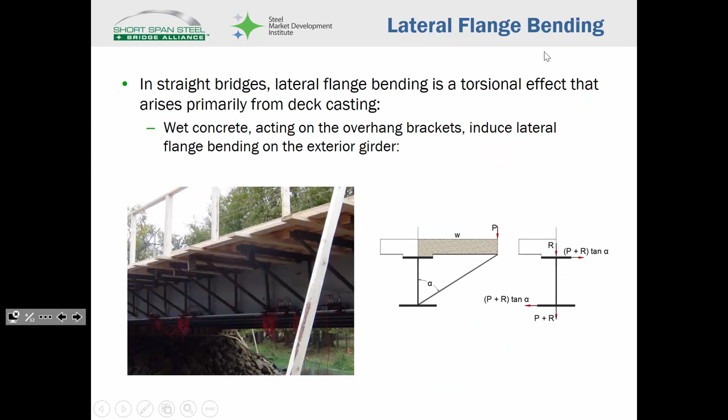So the idea is this: when we do a deck casting analysis and want to determine that torsional effect, how much that girder is being twisted, we say that all the uniformly distributed loads, like the wet concrete, we treat like this, and calculate that twisting moment as FL squared over 12, the distributed load times L squared over 12, because that's the fixed end moment. Any concentrated forces, like the screeding machine, the Bidwell—if you've ever been on a site where they're doing bridge casting, you can see the large screeding machine they use to set the deck elevation—we would treat as a point load, and say the bending moment is PL over 8, L being the distance between your cross frames. That gives you an idea of how much that girder is being twisted.

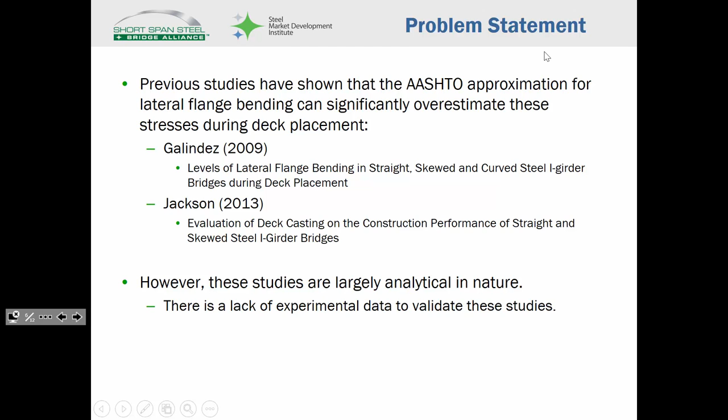Sound reasonable? So we did a number of analytical studies. I don't want to go into the research too much—I'm not here to teach you about my research, I'm here to teach you about bridge engineering. A lot of the numerical studies show that the equations we use are pretty conservative, so that's really all you need to know. If you go through the modeling and the hardcore analysis, you'll find these equations overpredict the amount of torsion in the girders. But that's fine from your perspective, because if it's overpredicting, you're being conservative, and you can go home and sleep easy knowing the girder's fine.

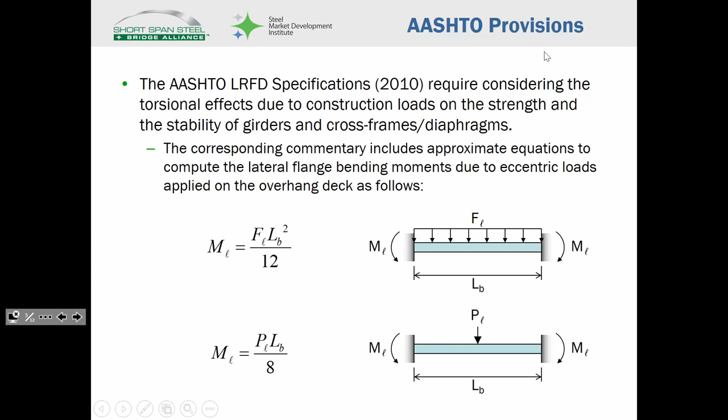Make sense? So since all the studies were analytical in nature, we wanted to do some field testing, to actually collect data and see what was going on. We did this in October of 2013. We checked the weather heading out there, and it was supposed to be like 40, 50 degrees—turns out it was 10. So I'm out there in the cold, wet, 10-degree weather, literally wearing everything in my suitcase at once to try and stay warm. But yeah, it was still fun.

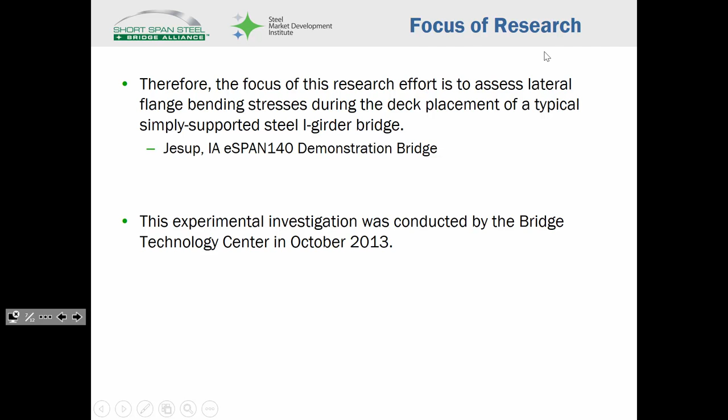We went out and instrumented the girders. We placed a lot of what are called strain transducers. The idea is as you load it, the girder deforms, and these things measure how much the girder is stretching or contracting at a particular point. If you've got a strain there, you can get a stress and use basic mechanics to figure out your moments and all that.

We looked at two different sections along the beam. So here's the beam, going along the bridge—we looked here and here, because those are the two sections that analysis showed to generate the worst bending, or the worst torsional effect. So we figured let's just do the worst case scenario.

We also did full-blown finite elements. I know my finite element folks should recognize this. How many are in finite elements now? Or anybody, is anybody in finite elements now? Are y'all doing stuff like this?

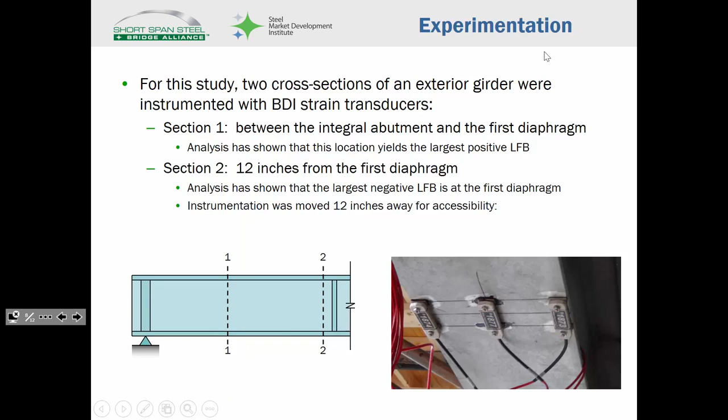We've been working on correction factors to try and take this and shift it down a little bit so that it actually matches what's really going on. The mechanics of it get a little funky, so it takes a little bit of thought to try and keep it simple. Does that make sense? Anybody have any questions on that?

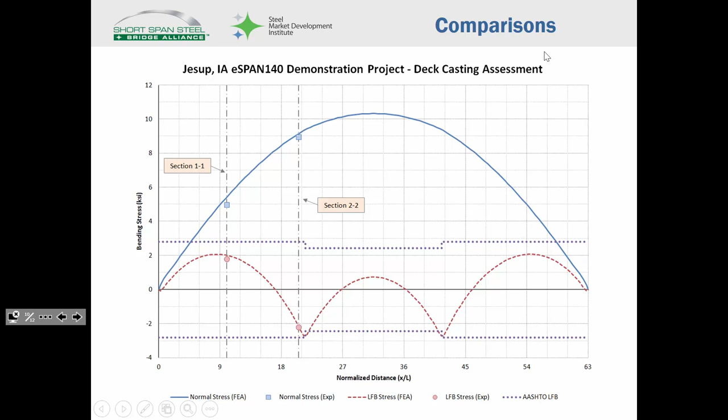Okay, the only other issue that I think is relatively complicated is the idea of second-order effects. A second-order effect can, I think, be most easily described as follows.

Let's say that I'm standing on top of a hill, and Barry decides he doesn't like me much, and he decides to give me a shove. So if he shoves me, I might be able to catch myself and stand up. Now imagine the same scenario, but imagine I'm wearing an 80-pound backpack. It's going to be a little harder for me to stand up, right?

Here's why. As soon as he gives me a shove, I'm standing like this with the backpack on. As soon as he shoves me, I'm like this. So now, that backpack is off-center, right? There's an eccentricity, so basically there's a bending moment. What's that bending moment do? It causes me to move over more, which causes more moment, which causes me to move over more, which causes more moment. See how it sort of builds on itself?

That's called a second-order effect. That's why if you had a backpack on and somebody pushed you, you get that whoa, whoa, whoa, whoa, whoa feeling. That's where that comes from. Does that make sense? You're going to see here in a second where we use

this effect, which is called lateral flange bending. You're going to see where we use an amplification factor. That amplification factor is going to try and account for that second-order effect. Does that make sense? Any questions on that?

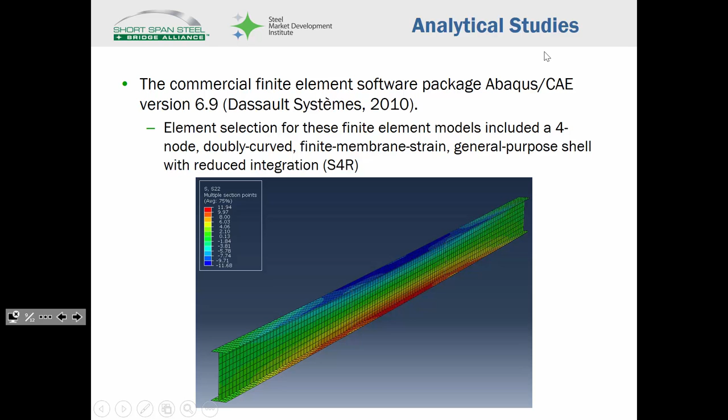My last presentation is to try and take all of the math that we have done throughout this entire semester and bring it all together in one big PowerPoint.

So, like I said, I do a bunch of work with the steel industry. One of the organizations I work with is the Steel Market Development Institute, which is where that SMDI thing comes from. We've done a lot of work to try and make bridge engineering a little simpler, not just for students to grasp, but for professors to use. We prepared a lot of lecture notes for engineers to use.

So I figured, let's save the best for last. We prepared a start to finish, full-blown design example. The way I do bridge engineering, I think this is a topic best reserved for the end, because if I showed you this at the beginning, every single slide I'd be stopping to explain what short-term and long-term is, what DC1, DC2 is. Now you all understand that, so I can actually go through the example and explain things in a logical fashion. Sound good? All right, so let's talk about the basics of the example.

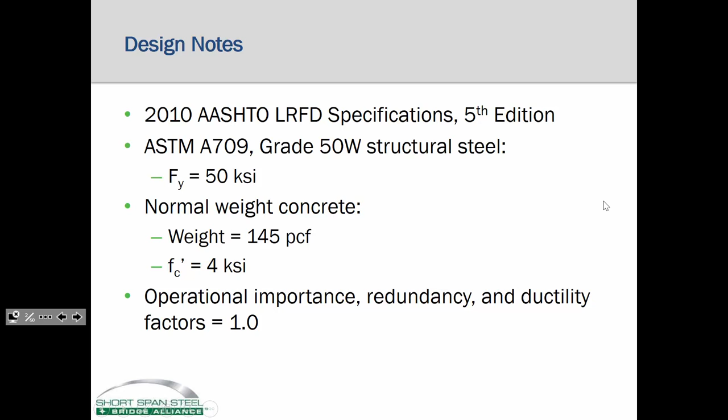Now, the load combos we're going to use: we've got Strength 1, Strength 4, which we haven't looked at yet, but Strength 4 is going to show up for construction, that's important for construction loads. We've got Service 1 and Service 2. Service 1 is really going to be our deflection check, and then we've got fatigue.

Some additional values worth mentioning: we've got formwork, which we're taking to be 15 pounds per square foot, and a future wearing surface, which we're taking to be 25 pounds per square foot. These are values we've referenced before in our other example, right? In Example 1, when we were looking at DC1, DC2, we used these values. These are pretty realistic upper bound values, if you will.

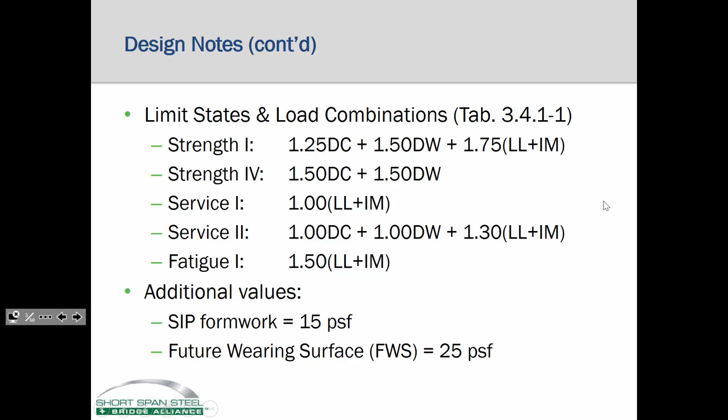If you can design one girder, you can design another, so I don't need you to go through and do all of that. Is that okay? Very good. All right, okay.

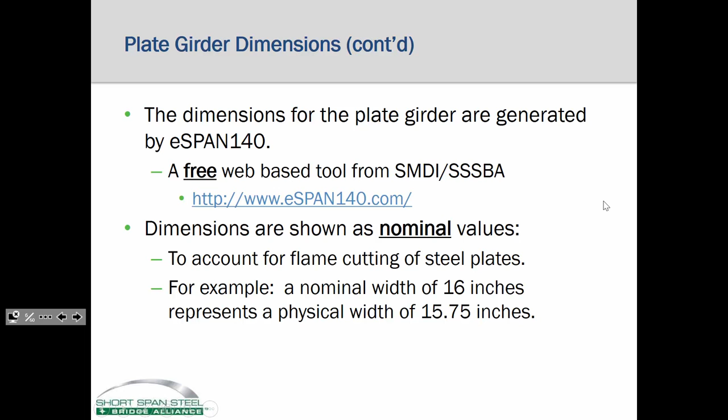One of the suggestions that came from the fabricators is for us to use nominal versus real values. The idea was if I want to cut a 16-inch flange, I have to use an acetylene torch, but if I actually measured a mark here and a mark here that was 16 inches and cut with acetylene, I'm going to burn a little bit off each end. So they suggested that for the design calcs, like if we've got a 16-inch wide flange, let's use 15.75—let's cut off a little bit. You don't have to worry about that for your project. That was just a specific request from the fabricators in the room, so that's why we did it, because they know fabricating better than we do. So that's sort of where that came from.

Let me ask you, I'm just curious to see if you've been paying attention this semester. Why do you think that we're looking at an exterior girder versus an interior girder? Why would it make sense from a design standpoint—if I'm going to look at one, why do I only look at the exterior? You can just guess, I'm just wondering. Well, no, that would be the difference between short-term and long-term. But I'm wondering, why are we focused on an exterior girder versus an interior girder?

Well, you're talking about distribution factors, and you're exactly right. The live load distribution factors for the exterior girders tend to be larger, so they tend to see more moment. So if they're going to see more force, just design for those. Plus, the effective flange width—this effective flange width for this girder is shorter than it is for an interior one. So the girder itself is a little weaker.

So in design scenarios, a lot of times engineers will just look at the exterior girders and size them all the same. So if you wanted, you could design independent girders for the interior. I do believe for your project, though, you are looking at just an interior girder, and the reason is because the live load distribution factors, I think, are a little easier to deal with. But it doesn't really matter—you could just plug and chug if you wanted.

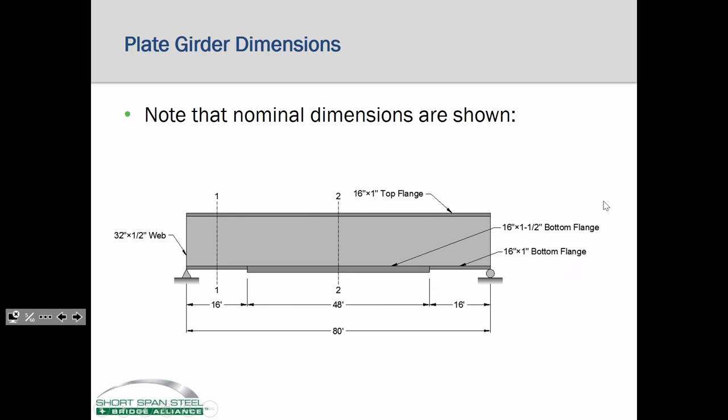So based on a given girder, you can compute this, and I've got to believe that by now you all can do this, right? You can compute all the necessary section properties, moments of inertia, centroids, all that stuff. You all should be masters at that by this point, right? Pretty basic stuff—just plug and chug into your Excel sheet and go at it. Any questions? Okay.

Now, when you just make up a girder, you have to ensure that that girder meets cross-section requirements. We have to size a girder such that the web slenderness is less than 150, the flange slenderness is less than or equal to 12, the flange width must be greater than or equal to the web depth over 6, and flange thickness has to be greater than or equal to 1.1 times the web thickness. So, given these girder properties, I can compute all the moments of inertia, but I better be using a girder that in fact makes sense, okay?

Now there's two more checks we need to make. This one should be fairly familiar, right? Because that's the one that guards against using a full-blown T-section, like a supermassive compression flange and a really tiny tension flange—that's not an I-beam, that's a T-beam. That one's simple. This one's probably new, I haven't shown you this one. This one right here states that the width of the compression flange must be greater than or equal to L over 85.

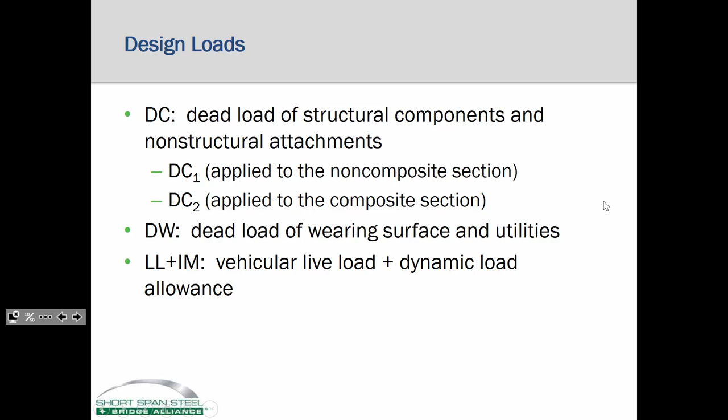We've got our slab, our haunch, that overhang taper on the ends for the overhang brackets, the form work, the girder weight, and then all those miscellaneous details. We've gone through this already, so you know how to compute girder weight, slab thickness, and haunch weights. We've gotten all that out of the way.

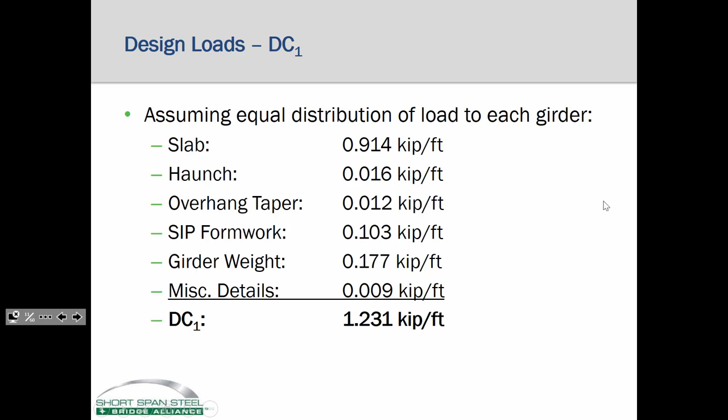So this should make sense. We're getting a DC1 of about 1.23, something like that, and that's a pretty reasonable value. We've gotten stuff like that in here before.

DC2, remember, unless you've got utilities or something like that going on the bridge, the only real DC2 weight you're going to get is your barrier. That comes out to be 0.153 kips per foot. Each barrier, these are a little light, only about 300 pounds per foot. There's 2 of them on the bridge, and there's 4 beams.

Future wearing surface is 25 pounds per square foot, applied over a roadway width of 34 feet, divided by 4 girders, so 0.213 kips per foot. Pretty familiar stuff by now, right? That should be pretty basic.

So there's our dead loads, live loads. We've got our truck and impact factors—truck, lane, and tandem, and our impact factors. Remember, for fatigue, the impact factor is 1.15. For all the other limit states we're considering, it's 1.33. If you're doing portions of the deck, it ends up being 1.75, but we're not really worried about that.

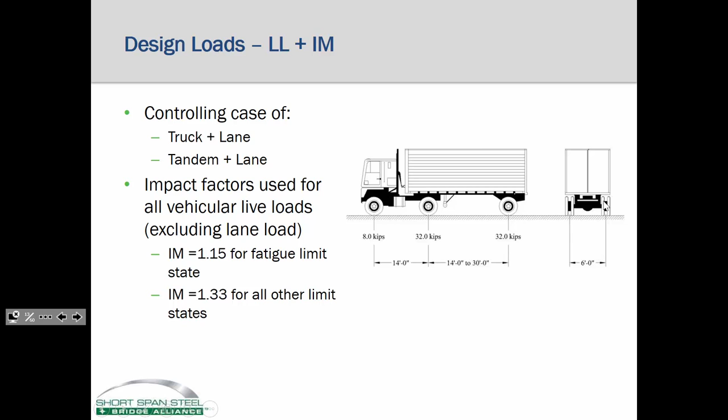Now, we can't just take the live loads, put them on there, and say we're good, because we have to use live load distribution factors. We've got a whole host of equations: our interior girder, and the exterior girder with the lever rule, the special analysis, all that stuff.

How do we begin? First off, we discussed multi-presence. Remember, multi-presence factors account for coincident truck loadings on a structure. So multi-presence factors: we have 1.2 for one lane loaded, 1.0, 0.85, and then anything past that we get 0.65. We have to apply those to the lever rule and to the special analysis provisions used for rigid cross-section rotation.

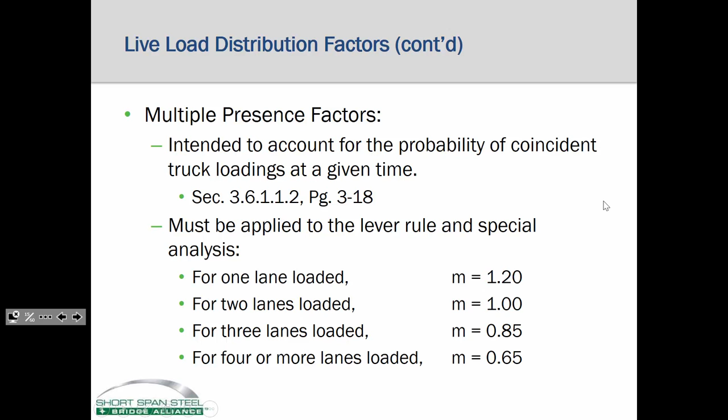Our longitudinal stiffness parameter is in the calculations, our first step for live load distribution. Remember this formula, it's basically just a measure of your composite beam stiffness for distributions: I plus A eg squared, multiplied by your modular ratio. You're basically transforming the whole thing into one big effective concrete beam. So we have our moment of inertia, the area, the EG squared. Notice these properties, like the moment of inertia, if I go back, I'm getting that from all those section properties—it's not like I just came up with it, we used it, so we got that here.

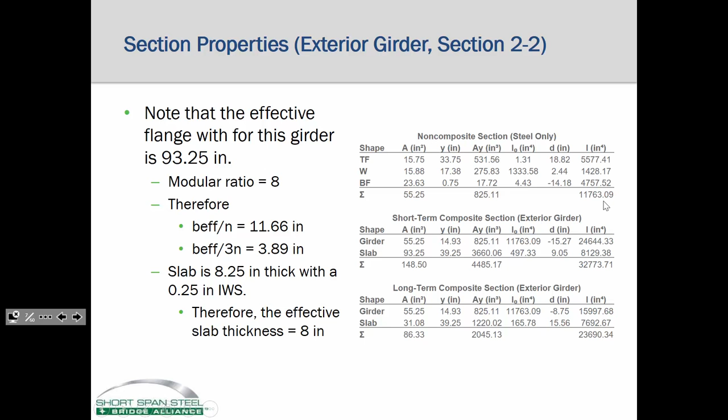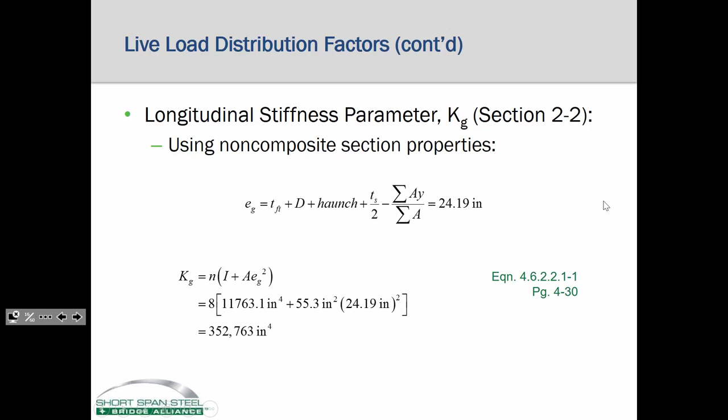Now we can start computing distribution factors. So we have distribution factors for the interior girder for moment. These equations should look fairly familiar, right? Girder spacing, span length, we have the longitudinal stiffness parameter, and our slab thickness, which ended up being 8 because we have an 8.25-inch slab and then a quarter-inch integral wearing surface. So plug and chug, and there you go. That's the interior girder for moment.

Here's the interior girder for shear. Those equations are a little simpler, right? Of course, could have used that for the calcs. Fun stuff.

All right, exterior girders. Remember, the first thing we do is our lever rule analysis. So for the lever rule, we take that first truck, we set it 2 foot off the barrier, and then we assume this is a hinge. We say, let's sum moments here to determine what that reaction there's got to be. We have 0.5 times this moment arm, which ends up being 9'9", plus 0.5 times this moment arm, which ends up being 3'9", or 3.75. Then we say, what is the required reaction at 10'6", or 10.5 feet? That reaction comes out to 0.643.

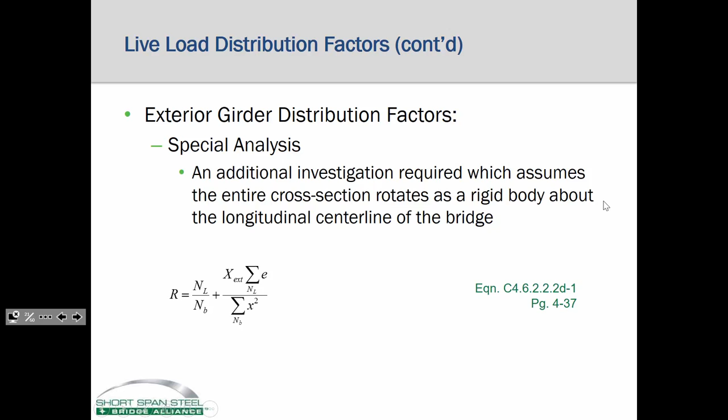Last one is special analysis, right? So that's where we treat the cross-section as if each of the girders were piles and our deck was our pile cap, and we're saying, okay, here's the truck. We don't want the whole thing to rotate, so what's the reaction got to be at that exterior girder? I know the equation looks nasty, but it's just loads on pile groups. And if you had foundations, then this should be a pretty familiar topic. The equation might not look familiar, but you should be able to do the analysis pretty easily. So remember, you perform special analysis for the number of potential trucks or number of potential lanes on the bridge.

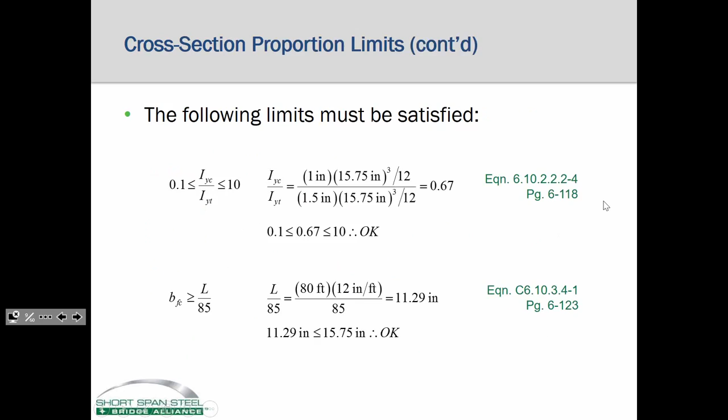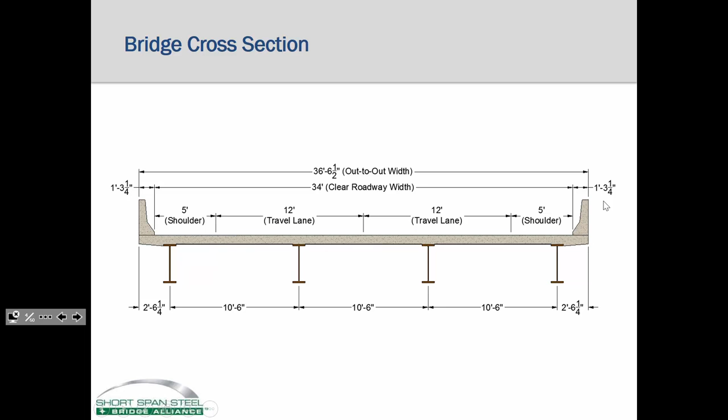Now let me go back a little bit. I should have had this image here. What's the total roadway width? It's 34 feet, right? So if I take 34 and divide it by 12, that's how I determine the number of lanes. What is 34 into 12? It's 2.8 something. I don't round that up. It's 2 lanes, not 3. I take the floor of that, the integer portion.

So going back to special analysis, I perform special analysis twice. Number of lanes divided by number of beams, plus the moment arm, which is from the center of the pattern of girders to the exterior most girder, which ends up being 15 feet 9 inches, or 15.75, times that moment arm, plus that sum of x squared, right? Remember that sort of effective moment of inertia we calculated for the girders. Do the same thing for 2 lanes loaded. The only thing that changes is the number of lanes becomes 2. We have to add up that second eccentricity, which does in fact end up being 0. And our multi-presence factor changes because now we've got 1, not 1.2. Sound good?

Like if it was over here 1 foot, it'd be 12 minus 1 foot, if the truck ends up being over here.

Because here's the idea, and that's a good question. So the idea is this. Imagine that here's your bridge, okay? We're treating the bridge as if this is a pile cap and there's piles going on down here, right? When we do that first analysis, the idea is that the truck is somewhere over here and we're trying to determine how much load is on that last pile. Now let's say that's the dividing line, that's the middle. If that second truck is somewhere over here, it's going to add more load to that girder or that pile over here.

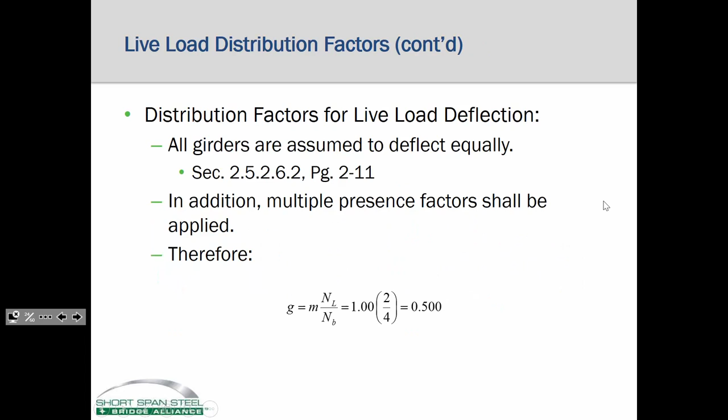When it's all said and done, you take the worst case for moment, the worst case for shear, and the deflection value, and compute your moments. So your worst case for moment, let me see what we've got. Moment: 0.533, 0.766. That looks a little larger. I think it's this one right here. That's actually the worst case for moment, 0.843. So that's your controlling distribution factor for moment.

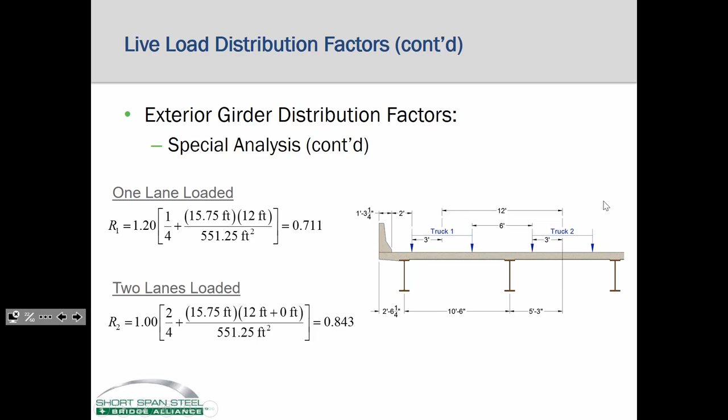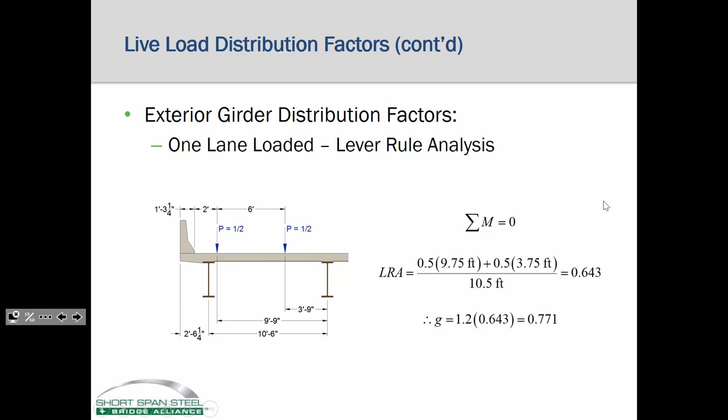For shear, I think it's one of the ones back here. Yeah, that's your worst case for shear, 0.985. So you're just finding the worst one. You can compute your dead load moments and shears, and then your live load moment and shear envelopes. If you notice, for shear there's a range of potential values. Theoretically, there's a range of potential live load moments as well, but because it's simply supported, they're all positive. Everybody okay with that? Any questions?

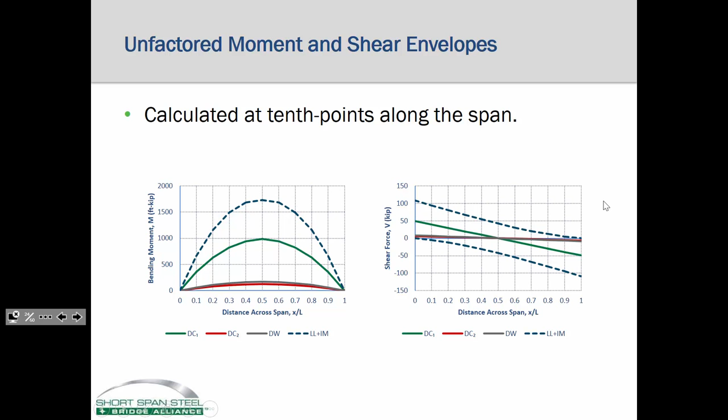Now it's time to use them. Now we're going to start off with a newer check, which is this constructibility check. And I'm going to explain how this works.

Basically what we're doing is a deck casting analysis. In a simply supported bridge in a deck casting analysis, what we're trying to do is assess the condition of stresses as the concrete deck is being poured. Now, if you've got a 60-foot, 80-foot creek crossing, how do you think they're going to pour the deck? They're just going to pour it in one big continuous pour. It's not like some multi-span highway bridge where they pour the positive bending regions first and then come back and pour the negative bending regions. For this, they're just going to pour it in one fell swoop.

So the wet concrete loads and all the non-composite loads, the DC1s, have to be resisted by the steel beam by itself. So we're going to have to assess that, but we're also going to have to assess that twisting effect. We're going to have bending stresses, and we're going to have that lateral flange twisting effect. So we have to assess both of them.

Now, in this example, I'm going to throw in a couple values. First off, the unbraced length - that's going to be the cross frame spacing. I'm going to say that for this bridge, the cross frames are spaced at 20 feet, which is a value I gave you for each of your projects. Some of you might have a 60-foot bridge, but the cross frames are every 30 feet or what have you.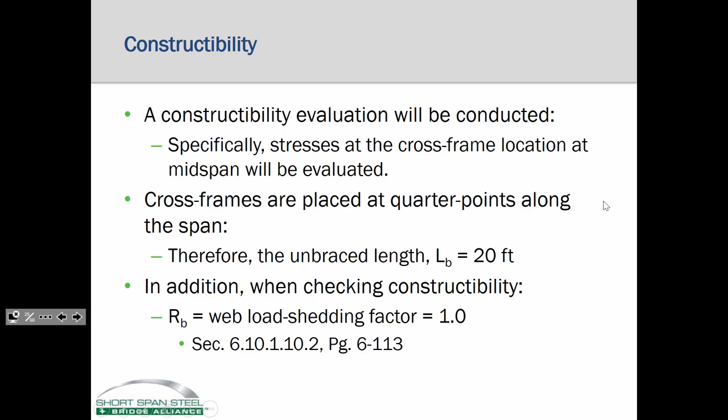Any questions? All right. Now, when you're doing a construction analysis, there's not just the wet concrete - there's also the other stuff that goes along with the analysis. So I'm going to propose the following load components: the overhang deck forms, those are the brackets, the construction walkway, all that stuff. I'm going to assume that weighs 40 pounds per foot. These are pretty reasonable estimates. You could obviously go through and look at your construction plans and actually do these takeoffs. I'm not going to go crazy into load estimation because you all can do that - you're smart enough now.

And by the way, on your project, you're more than welcome to just use these values. This is totally fine, okay?

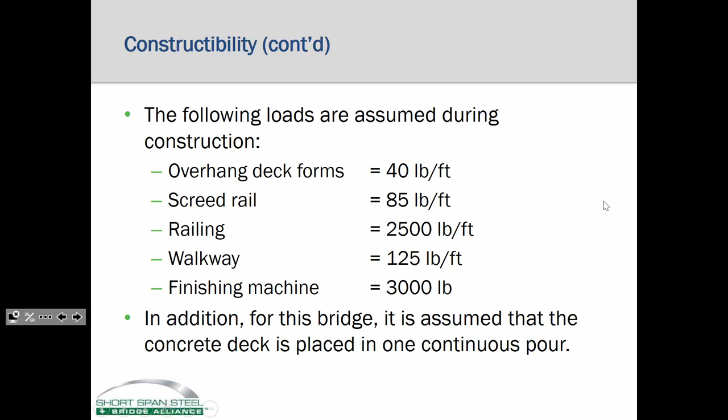We have the screed rail, which is the rail that the Bidwell machine runs on. We have the railing as well, the walkway, and a lot of these loads also take into account construction personnel, so some of this can get pretty hefty. If you've ever seen a construction Bidwell, it's not a small machine, they're pretty large. The actual finishing machine itself we're going to assume to be 3,000 pounds. So it's funny how this is a point load, PL over 4, and these are all distributed loads, WL squared over 8. These are pretty reasonable values to go off of.

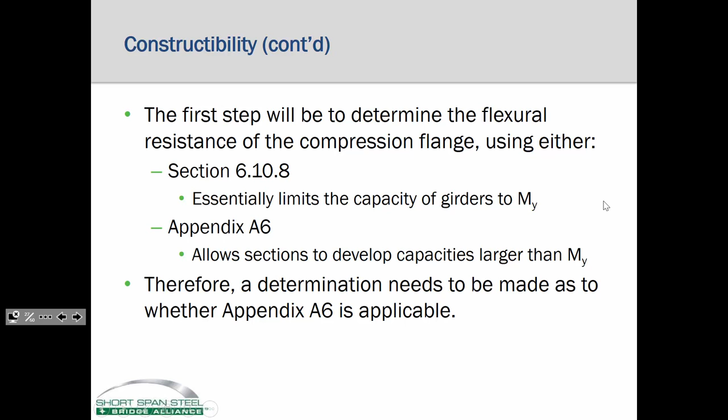Now, in order to do a constructability assessment, we have to calculate the capacity. That's where that whole 6.10.8 and Appendix A stuff came in, where you're like, where the heck is this massive spreadsheet and all these crazy equations we calculated coming from? Or where are we going to use it? Here's where we're going to use it, okay?

Now, we ultimately will find that for this example, Appendix A is applicable. How do we do that? A lot of this should be pretty familiar. So we start off, we've got our yield moments and our section moduli and all that. We've got our plastic moment, remember that? Keep in mind, for this we are looking only at the steel shape by itself - no concrete deck, no short-term composite or long-term composite. That doesn't exist because we're looking at the bridge as the concrete deck is being poured, right? The concrete is not effective at all in helping the girder resist those loads. So all we've got are PC, PW, and PT. We determine where the plastic neutral axis is and go off that table. Pretty straightforward stuff, right? You all should be able to do that, right?

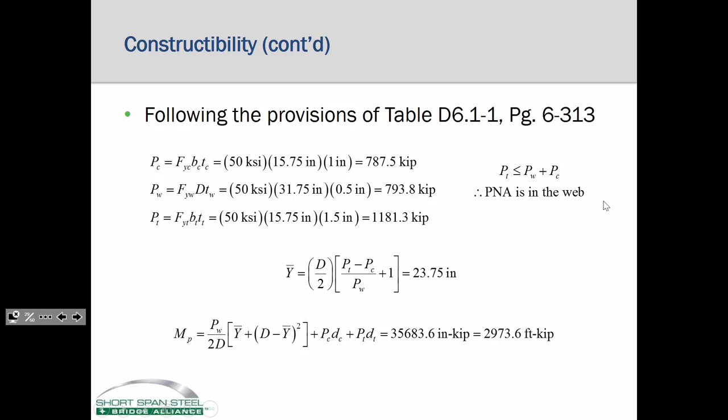All right, we introduced these terms as well - remember DC and D sub CP. So DC is the depth of the web in compression in the elastic range, and DCP is how much web is in compression at MP. I'm not going to belabor those calculations, but you can find them in here. For instance, we find that the PNA is in the web, and we get Y bar is 23.75. That is also how much of the web is in compression. Where am I getting DC? That's from the centroid, from all the section properties that we did way back in the beginning. So you all should know how to do that as well.

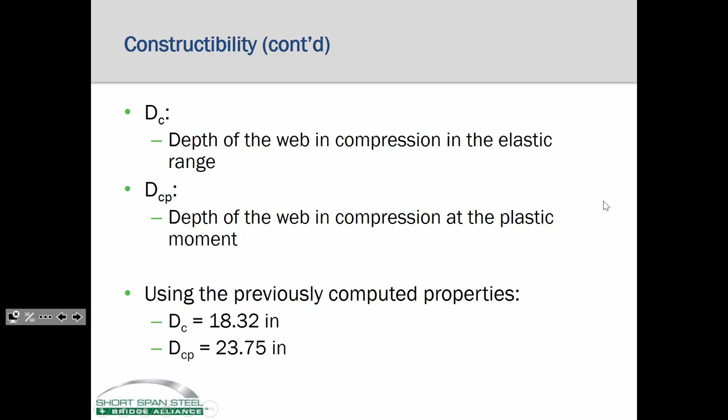Any questions? Okay, all right.

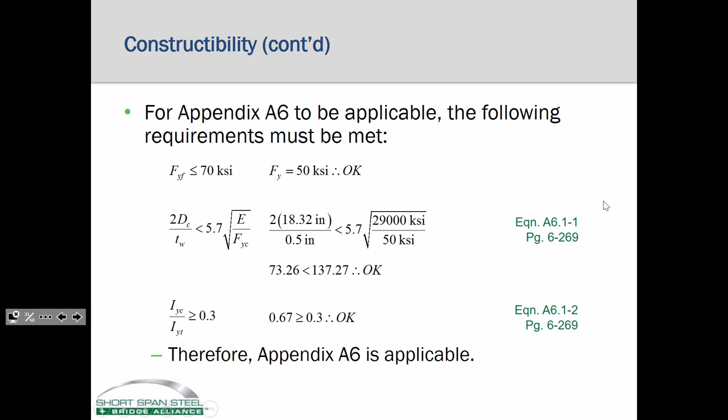We've got 3 checks to determine whether or not Appendix A is applicable. We have to use a yield stress less than 70 KSI. We have to meet the following web slenderness limit, and our IYC over IYT has to be greater than 0.3, which we're good - pretty basic stuff, right? So Appendix A is applicable. Remember, when in doubt, you want to use Appendix A. The calculations might be more laborious, but in the end it's more capacity. If you could just do more math and come up with a stronger girder, why not use it? It's what it's there for.

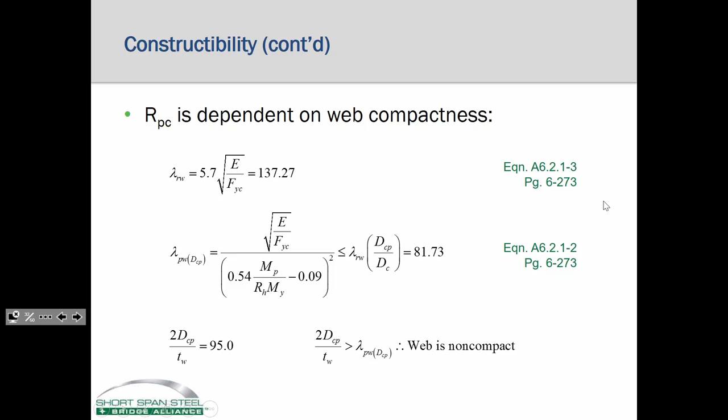So, if you have Appendix A governing for your section, you first compute your web classification factors, your RPCs. Since we're doing constructability evaluation, I'm only looking at RPC. But remember, when we do RPC, there's that host of stuff we had to compute - all those different properties, lambda RW and all of that. Go through and do all of this, and you will find that the web is non-compact, so you get to use your nice, pretty nasty equation that I'm sure you all loved plugging and chugging, right? Your RPC and RPT interpolation functions - go through and chug it out, and you end up getting a web classification factor of about 1.15. You've got all the values, and you have calculators you can follow along with if you'd like.

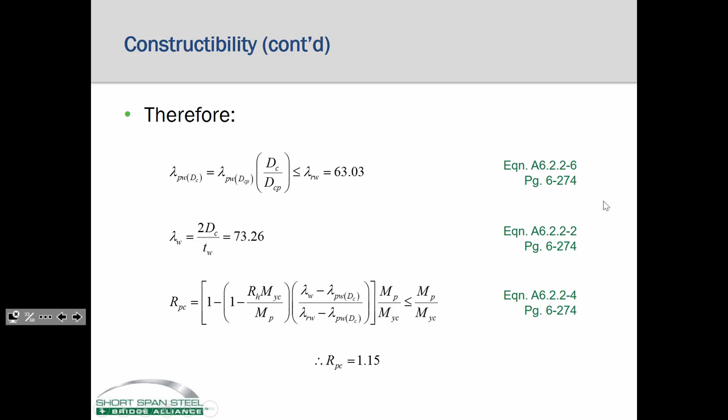Sound good? All right, now the last thing we need to do is actually use that to compute the capacity. It's a function of the flange compactness, and the flange for this section is in fact compact, so that actually came out pretty easy. The moment capacity is just the yield moment times RPC - it's not a funky expression. Came out to be about 57.41 KSI.

Okay, remember 6.10.8 allows you basically just to reach MY, so your maximum capacity could be 50 KSI. But Appendix A will allow you to go a little bit above and beyond. All right? Everybody okay so far? Okay, so this is where Appendix A comes from.

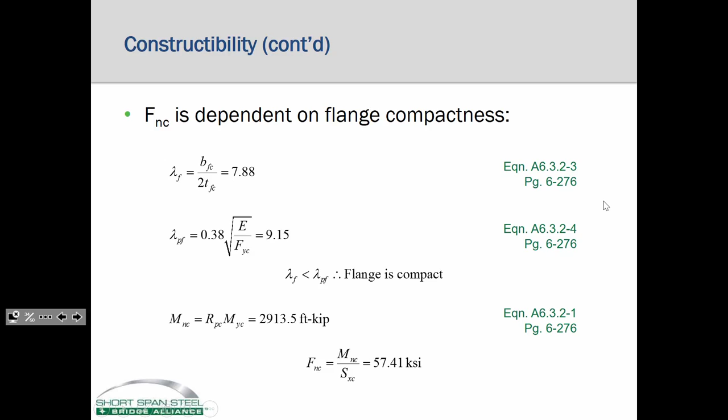We're calculating a flange capacity of 57.41 KSI. Now we've got to compare that against load. Remember, we've got two stresses we've got to assess: the regular old bending stresses that you get from a moment diagram, and then that twisting effect.

We got the moment diagram, we looked at that earlier. Here's the twisting effect: remember, FL squared over 12 and PL over 8. Pretty straightforward stuff. We can use those expressions to compute the stresses very easily.

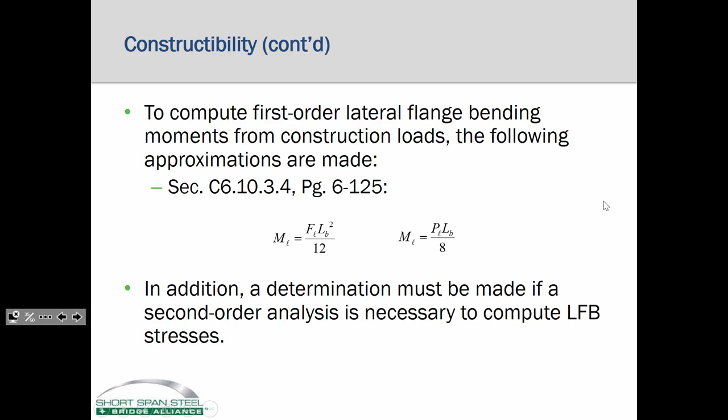But then we've also got to do that second order check. Remember that whole backpack thing? The second order, we got to check that as well.

If we end up meeting this limit, we don't have to deal with that second order stuff, that whole kicking over and twisting thing. It's a pretty straightforward check. If your cross frame spacing is less than or equal to 1.2 times LP, that's one of those anchor points you did in Appendix A, times the following relationship: your moments divided by the yield moment on the bottom, C sub B on top, that moment gradient modifier for lateral torsional buckling, and then RB, which is 1, because we're taking that to be 1 for this check.

Now we end up doing two different load combinations here: strength 1 and strength 4. The reason for doing strength 4 is it's indicative of very high dead to live load ratios. Think about it: when does a bridge see no live load but very high dead loads? During construction, right? There's no trucks on the bridge during construction, it's just the self-weight of the bridge itself. So strength 4 is a load combo that makes sense. We're only looking at DC1, so bear with me on that.

We got to compute C sub B, which I showed you all how to do, and you all have the spreadsheet available that can do that. Remember, you interpolate your moments at the cross frames, and then in the middle, then plug and chug to get CB.

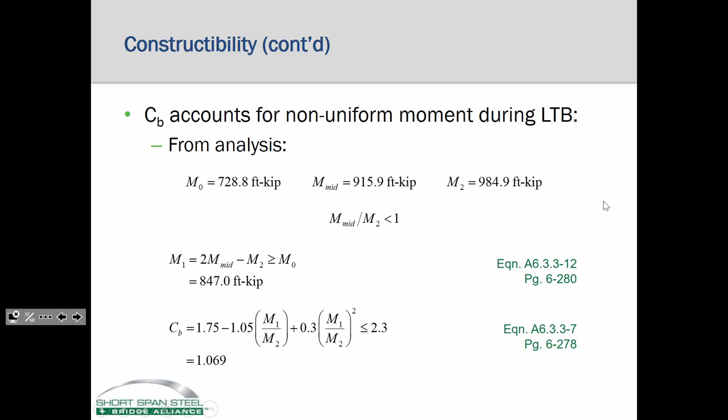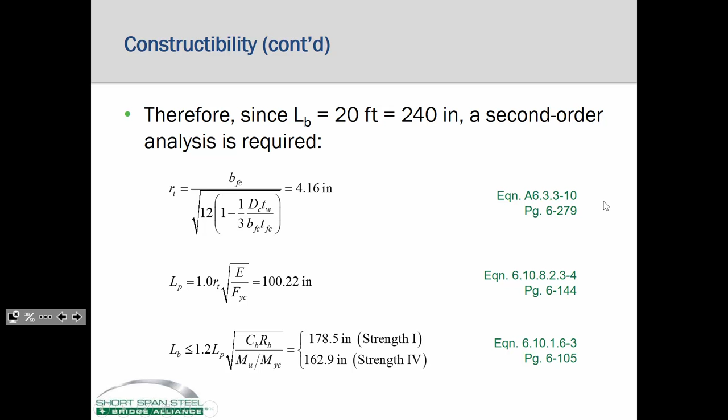Go through and do your calcs. When it's all said and done, you end up finding, shoot, we do have to do that backpack thing. We do have to do the second order analysis because the limit doesn't quite meet. Cross frame spacing has to be less than or equal to what's calculated over here. Cross frame spacing is like 240 inches, we're nowhere near there. Shucks, we got to do a second order analysis.

To do a second order analysis, what we end up doing is what's called an amplification. Think, standing on the hill with that backpack, those stresses build on themselves, right? And they amplify. The easiest way to handle that is through what's called an amplification factor. We end up just taking the stresses that we straight calculate and amplifying them by this: it's 0.85 divided by the following fraction.

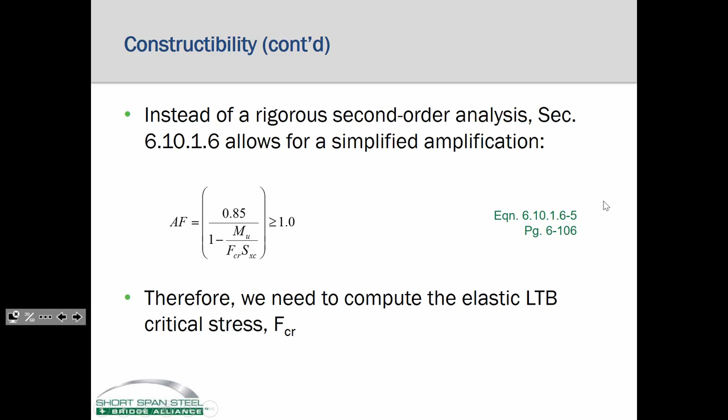1 minus your moments divided by F critical times your section modulus. Section modulus just comes straight from your section properties, that spreadsheet at the very beginning. And FCR is your elastic LTB stress.

So again, I know more and more equations, but ultimately it's just very plug and chug. J, simple, right? H, remember H is from centroid of flange to centroid of flange, simple. That FCR term right here, it's just that. Now, if you took undergrad steel design, that should be a familiar equation, right? Elastic critical LTB stress, pretty straightforward stuff.

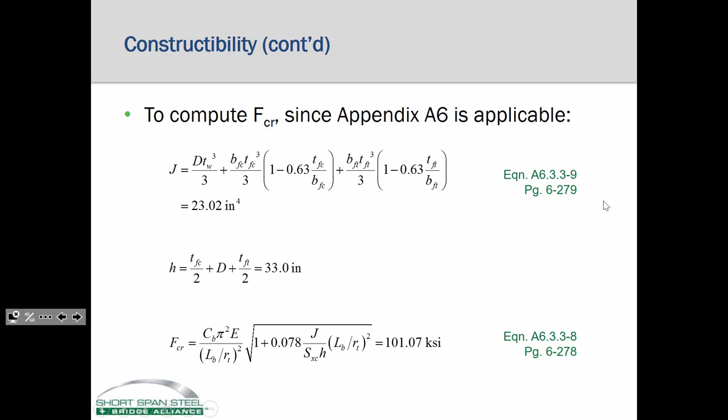So far, so good. I know I'm throwing a lot of equations at you, but it's all done. Our hands aren't developing carpal tunnel writing it all out, right? Not too bad.

We're almost done, actually. So here's the long and short of it. After you go through and do all those calculations, so your first order lateral torsional, or your first order lateral flange bending stresses, remember just lateral flange bending moments divided by your section modulus, pretty straightforward. I'll produce probably a little guide I'll show you on MU Online to streamline that calc a little easier, because that's the one calc I think I'm skipping, but I can take those values and show you, oh, it's just, you'll see it's pretty plug and chug.

Amplification factors. Here's your first order, here's your amplification, that times that, that's your second order.

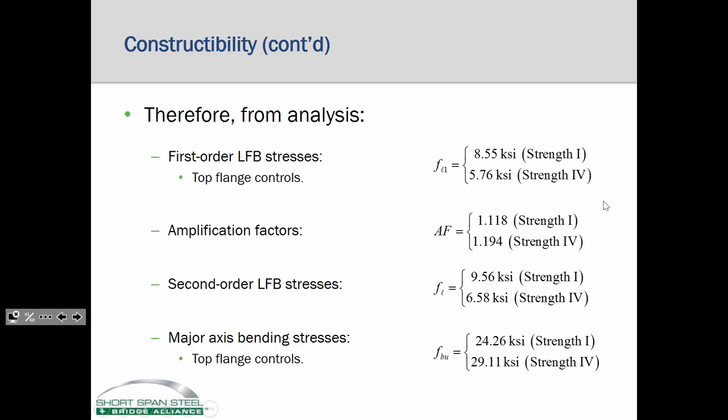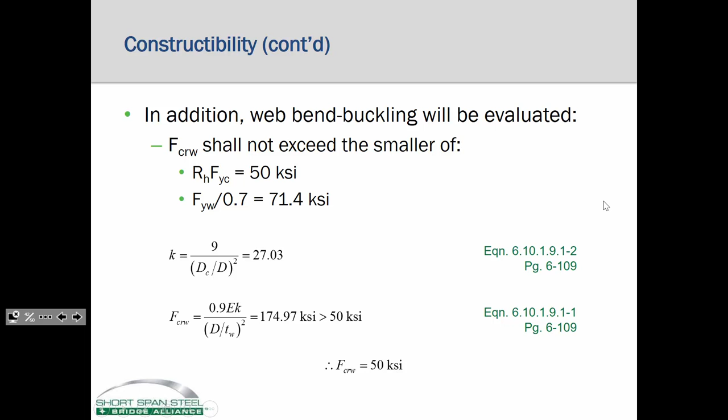So, pretty straightforward. We go through, we compute web bend buckling resistance, and once we've got that, which ends up being just 50 KSI, we can start doing checks. We have 3 checks that we end up having to assess.

Just that the sum of those stresses better be less than or equal to Fy. So we sum them up directly, and our worst case scenario ends up being strength 4, and we end up getting about 36 KSI being put on the girder. That's less than it can hold, which is 50, so we're good. I know that's a pretty convoluted calculation, but figure we'll get that one out of the way first.

Now you'll notice I've got these ratios. I'm just taking that divided by that. So that comes out to be about 0.72. I don't want that number to be greater than or equal to 1. If it's greater than 1, that means there's more load on the system than there is resistance, and that's bad. That's grandma's in the river, okay? Now 0.99, that's great, I'd love them to all be 0.99. That's not going to happen, but if you can get one of them to be in that 0.9 range or something like that, you're doing pretty good.

Sound good? Okay, now this is your first check. Your second check involves the 1/3 rule. Remember, we look at that flange as if it's a beam column, and then that 1/3 rule is that interpolated effect for the top flange. This is where we use that value that took ages and ages to compute.

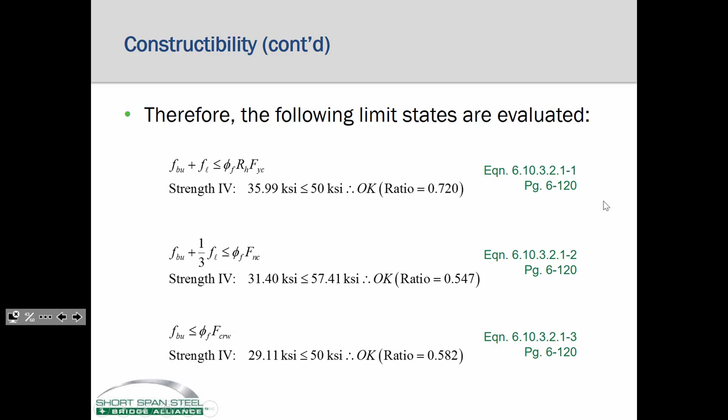Last thing we do, we compare our major axis bending against web buckling, and we're good there. So I know that was a lot of stuff for one small check. Any questions? Everybody good? Okay.

Hang on with me a little bit, and I think we're not going to meet for round 2. We'll just go through this and then we'll call it. Sound good? Okay, so that's constructibility. That's the deck casting stuff that I said I would cover this week. The rest is review, okay, the rest is review.

All right, for the service limit state, we have 2 checks we're going to do. We're going to have live load deflection, and then we're going to have permanent deformations, the 95% of the yield stress. So live load deflection is pretty simple. Your limit is essentially L over 800, the length of the bridge divided by 800. That's the typical live load deflection limit for bridges that don't have sidewalks. And you can find that in section 2 of the spec.

From the analysis, we just go through and do all those moments, shears, and deflections like we did before, and we find, well, 0.67. All right, we're good. That's it. And all we do to compute this value is this: we take the deflections from 2 cases, the truck, or 25% of the truck plus the lane. We apply the impact factor to the vehicular component, to the truck, and that's it. Worst case scenario, multiplied by your live load distribution factor. And that's it. Yes, sir?

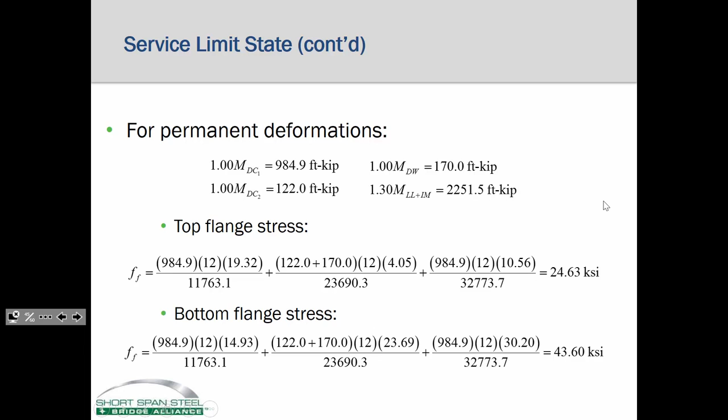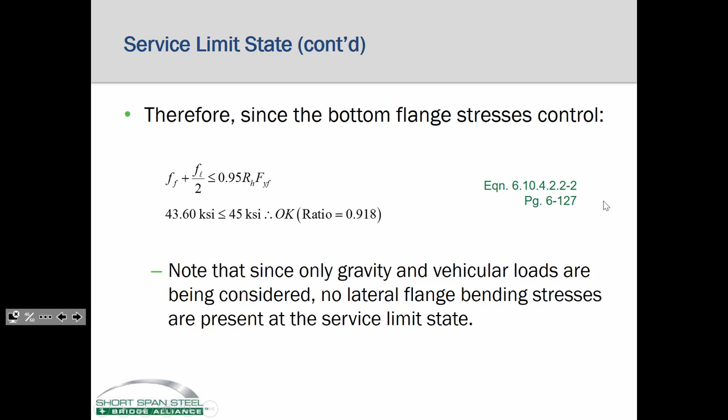I compare those against 95% of the yield stress. Obviously that one's the worst case scenario, and that's a pretty serious check on this bridge. We were like 90% of the way there. In fact, unless my memory is failing me, that's actually what governed the design. What was all said and done was that check. We wouldn't have known that until we went through and gone through the motions, but I think that's the one that actually governs. That's a pretty good ratio, you know what I mean?

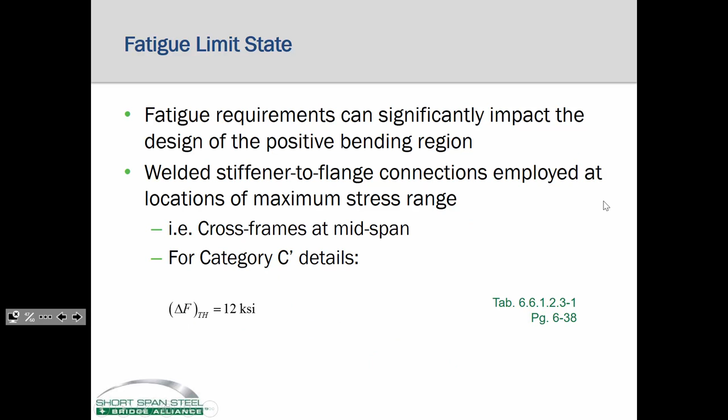All right, that's service, fatigue okay? Fatigue, we're going to look at infinite life, so we're going to just assume - do we? No, I think we actually go through and determine whether we're in infinite life or finite life. But ultimately, infinite life governs. Our fatigue threshold stress is 12 KSI. We look at the traffic to determine whether or not we're in infinite life or finite life. For this one, we assume 4,000 trucks per day, not 4,000 vehicles per day. So that's 3,400 trucks in a single lane, and that's way more than the value for infinite life versus finite life. I think that was like 700 or 800 or something like that. So we are well within the wonderful world of infinite life.

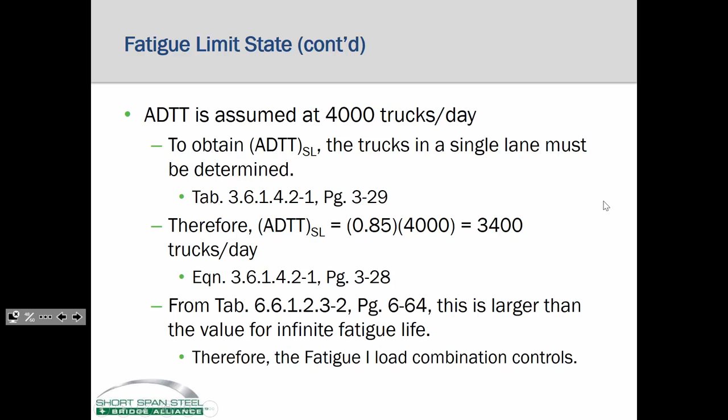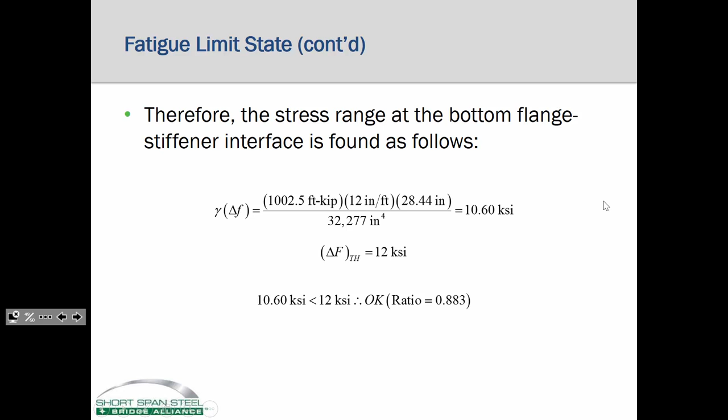Calculate our stress range at midspan. Our actual stresses are 10.6, and this is the capacity. We're good, 0.883.

The last and final check that we need to do is the strength limit state, where we're looking at whether or not the bridge is going to fall down or not.

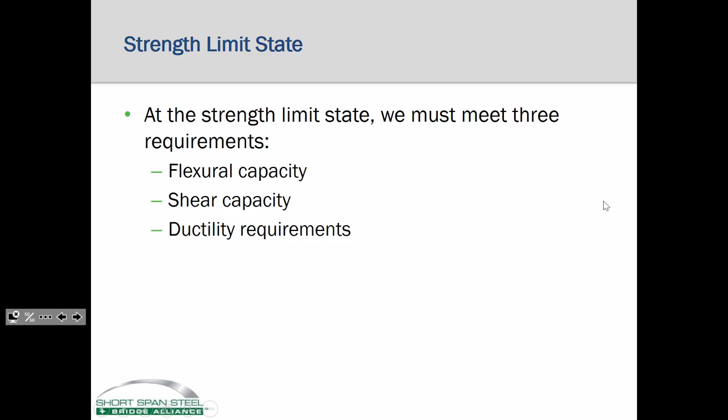So for flexural capacity, we've got to look at MP again, but in this case, we're looking at MP for the entire girder and the slab. So plug and chug, we get that the plastic neutral axis is in the top flange. Go through and we get an MP of about 5,400 foot kips.

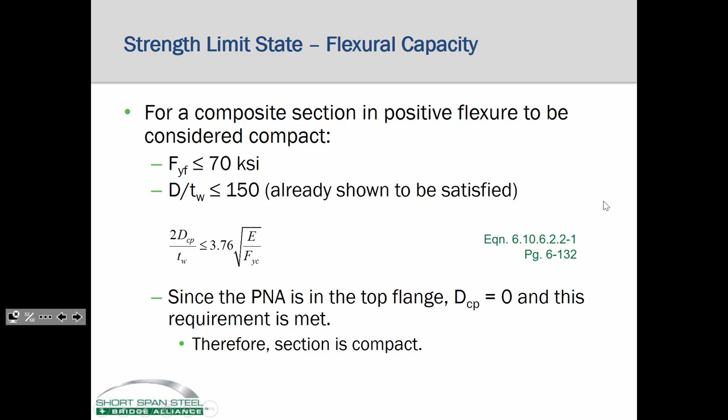We need to determine phi mn, so we need to determine whether or not it's compact or not, which it ends up being because our web slenderness is good. Our flange yield stress is less than 70, and we meet that limit easily since DCP is 0.

We get our capacity, remember that bilinear fit, it was either MP or that linear trend off of MP. Go through and we get an actual moment capacity of about 5,031 foot kips. Compare that against the applied moments. Nope, I was wrong, that's the one that governed, 0.928.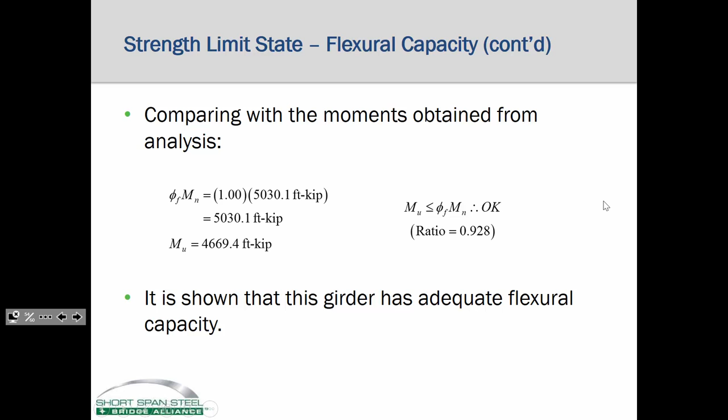So far so good, right? Now, you're going to like the shear check on this girder because it's pretty simple. Remember that massive shear stiffener layout that we did? Well, to compute the capacity of the web in shear and to see whether or not we even need stiffeners, what we end up doing is this.

We assume, first off, that there's no stiffeners on the girder at all. Then we say, all right, let's determine what's the capacity of the web if there are no stiffeners. Let's compare that against the loads and see, well, do we even need them? Let's go through and do that.

We compute the plastic force on the web in shear. Remember, that's 0.58 times the plastic force, Fy times the area. We use that 0.58 for that von Mises yield criterion for the metal. Remember, metals in shear yield at about 58% of the yield stress.

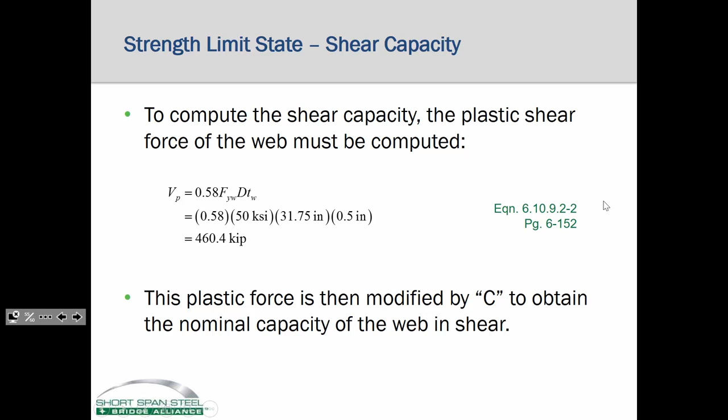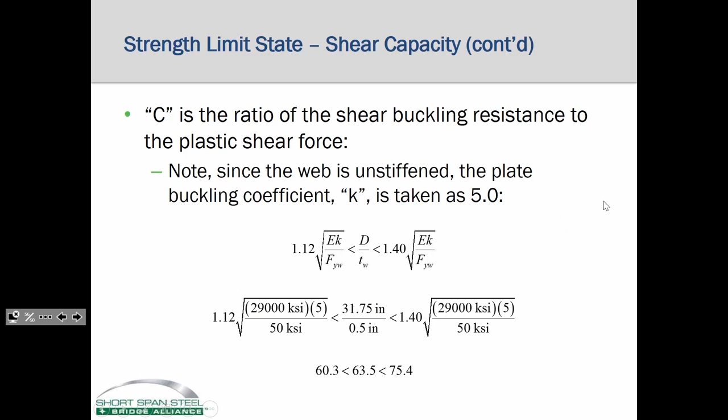We're then going to take that and multiply it by C. That's that constant that'll tell us how the web buckles. So we end up checking our web slenderness to see what limit we're in. I think we're in zone 2, so our C constant is computed as follows. You can go through and find all the equations in the shear presentation. They're pretty simple.

And lo and behold, we get a shear capacity of about 437 kips. Now that's assuming there's no stiffeners whatsoever on the girder. The loads are only about 271. So that means, you know what? We don't need to throw any stiffeners on there at all.

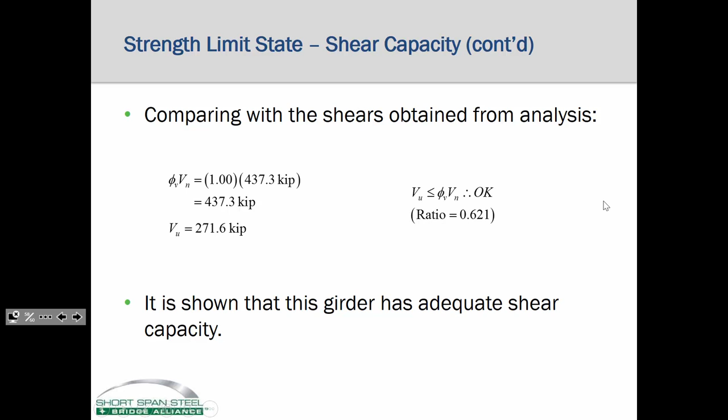No, we don't have to do that massive stiffener layout like we did on that last example. That example, that was a really slender girder over a very long span. Yeah, you needed some stiffeners. This is an 80-foot creek crossing. You shouldn't need any if done properly, and you didn't.

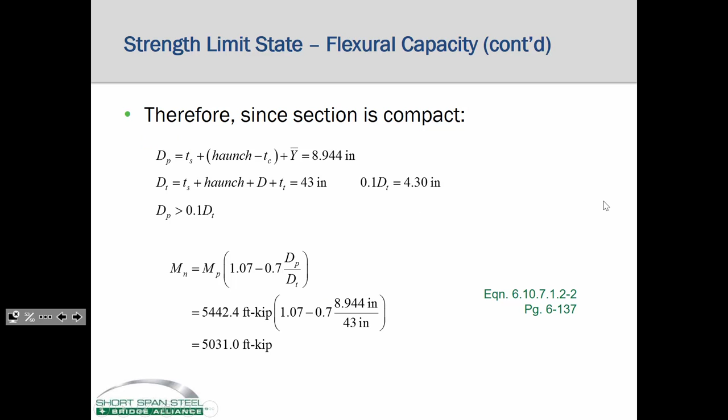Sound good? The last check is just a ductility check. It's just comparing dP and dt, which you all have. We have that from doing the moment check. It's pretty basic, right here. So dP's 8.94 inches. The total depth of the section was 43, so we're good.

Now, we just went through a lot of stuff just now, right? A lot of different calcs, a lot of different math. It probably seemed like a whirlwind, right? Imagine if we had done this in week 1, where you didn't know what any of those terms were. I'd be on this presentation for the whole semester, because that's what we did all semester. We were trying to explain that. Everything that went along in that presentation, that's what we were trying to explain.

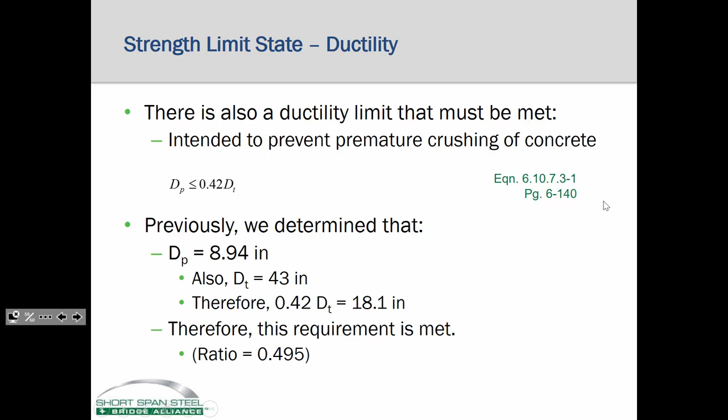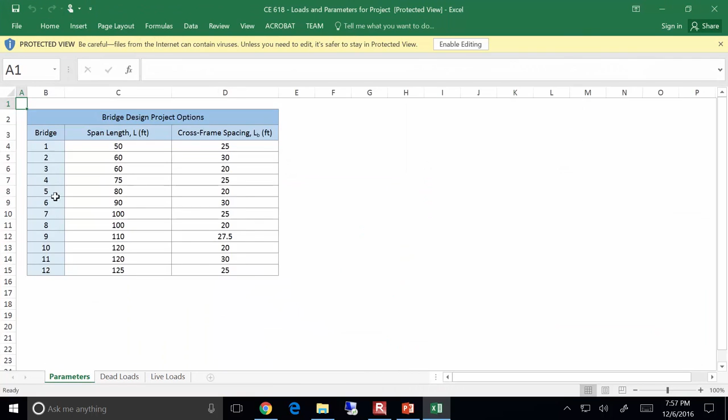And I'll change that to December 16th. It's not due just on Friday. So, okay. These are the project options, right? So remember we had our little random drawing. Somebody got option 8, somebody got option 3, what have you.

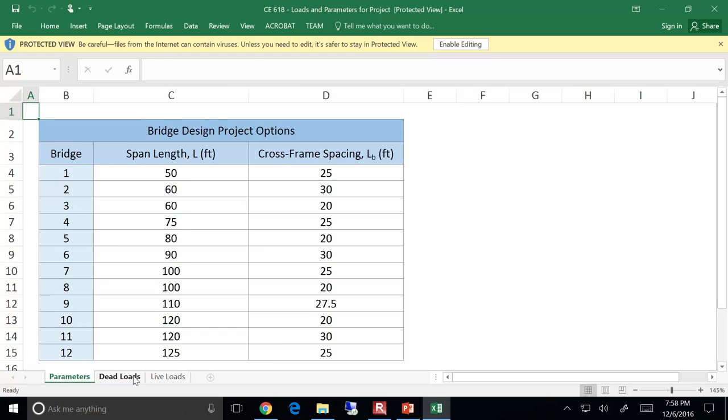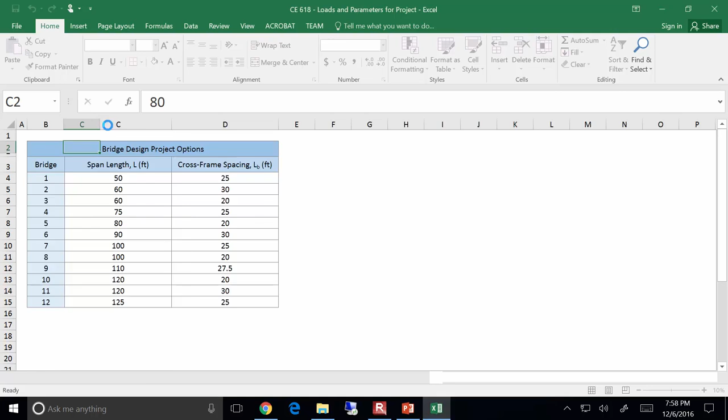For instance, if you go to dead loads, all you have to do is enter in a girder space or a span length. So for instance, if I say, well, I got the 90-foot bridge. Oh, enable editing. If I say I've got the 90-foot bridge, everything else updates, you know what I mean? Now you're going to have to compute DC1 and DC2 and DW, but the idea is you can link your previous calculations. You just say equals whatever, and it'll do that.

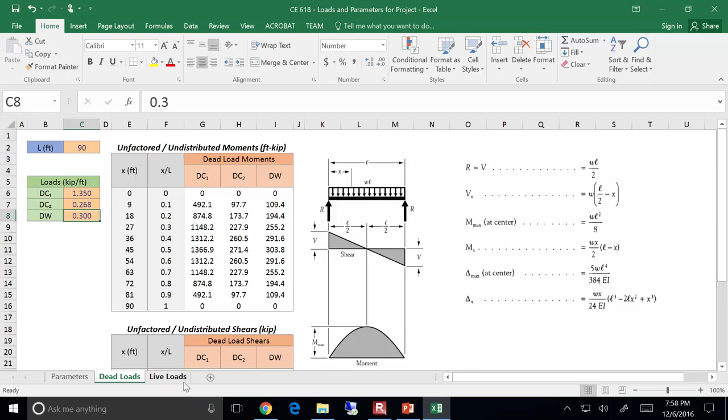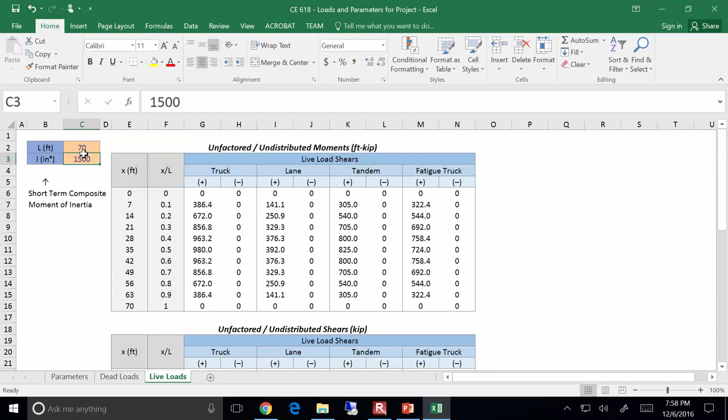For live loads, all you have to do is enter in your span length. So for instance, if it's 70, there you go. And what it's doing is there's, I think it's like right here, there's a hidden sheet that's got everything listed for every span length. So I decided to make it easy on you, and if you've got a 50-foot bridge, all your moments, shears, and deflections are taken care of. So that's one thing. That's a computer. That's what a computer's for.

You did an influence line homework. That's just influence lines over and over again, and you've got a bachelor's degree, so I know you can do that. But everything else, the section properties, the flexural calcs, the shear calcs, that you do need to do. But I wanted to give you the raw data so that you all can take it and use it as appropriate.

And if you go to the grade column or the grade section of grades in Blackboard, there's a column that's called Project ID, in case you forgot. So it's got, like, you might have Project ID 4 or what have you. That's your parameters. So, sound good?

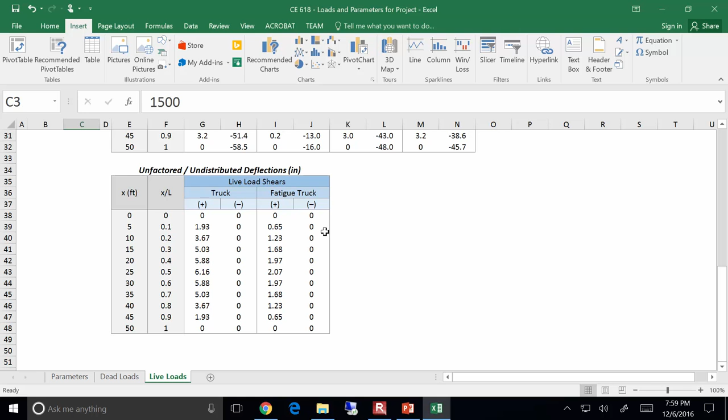All right. Any other questions at all on bridge engineering, life? Yeah. Anything at all? All right.

Well, look, I know that this was a marathon lecture tonight, but I thought this was a good way to close it out because that's it. That's in a nutshell. That is how to design a bridge.

All I can say about concrete, if you are using a concrete bridge, really the only thing that changes is your resistance. I mean, the loads are the same. It's still the same truck and whatnot. It's just different resistance. But that's what pre-stress is for. Take pre-stress, you'll learn all about it.

All right, that's not only all I have for you for tonight. That's it, that's all we've got. I will email you the final. It'll be a short answer discussion-based final. You all have your project that you're working on. Both of them due next Friday on the 16th at 5 o'clock.